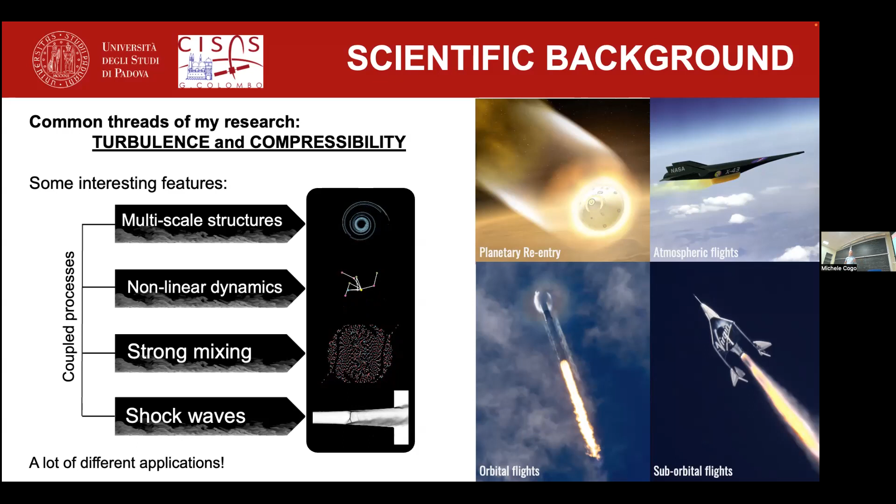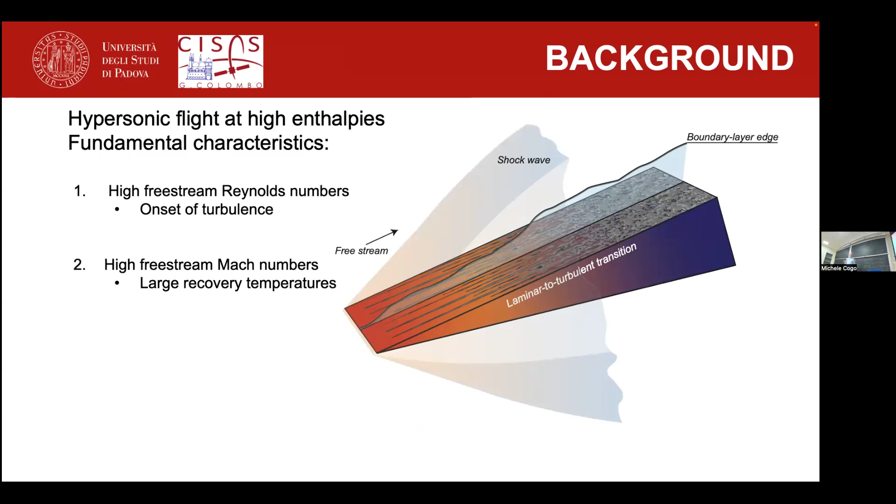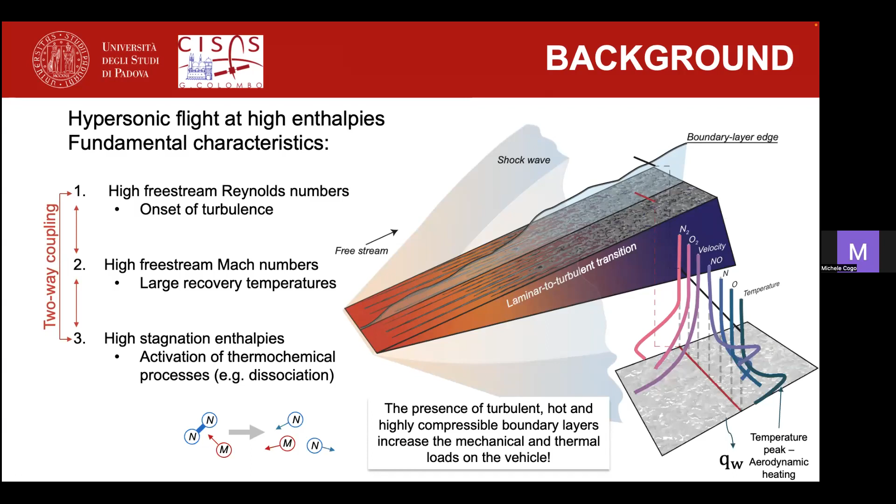There is a phenomenon called aerodynamic heating, which is really interesting in hypersonics, and I'm going to talk about this a bit in the next slide. In general, the presence of turbulent, hot, and highly compressible boundary layers increases the mechanical and thermal loads of the vehicle. So we must study them to inform design choices.

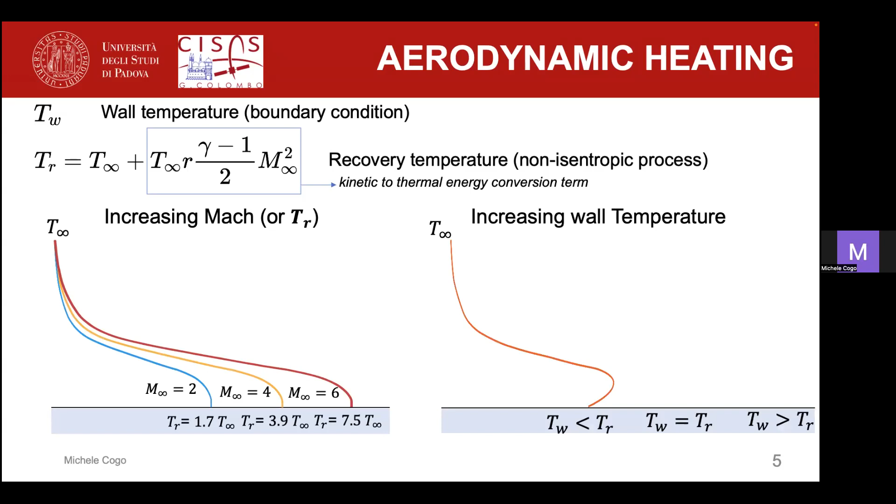And this means that you have a formation of a local peak. And this is the most interesting case, the case where aerodynamic heating is generated, because the friction of the flow with the wall transforms kinetic energy into heat, and this heat is transferred from the flow to the wall, and it's a problem.

Then you can, as a thought experiment, increase more and more the wall temperature, but you will encounter even higher temperatures. This is relevant for some results we will see later, and it's an interesting fact of hypersonic flows that you have a non-monotonic behavior of temperature near the wall.

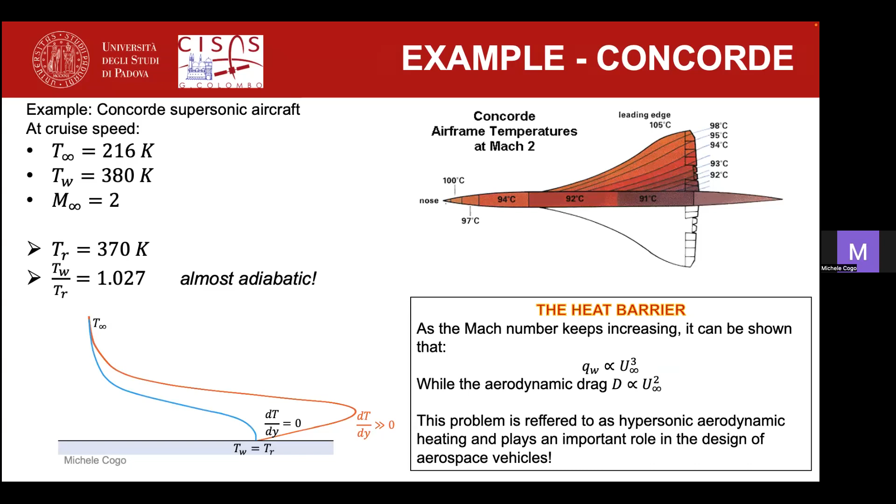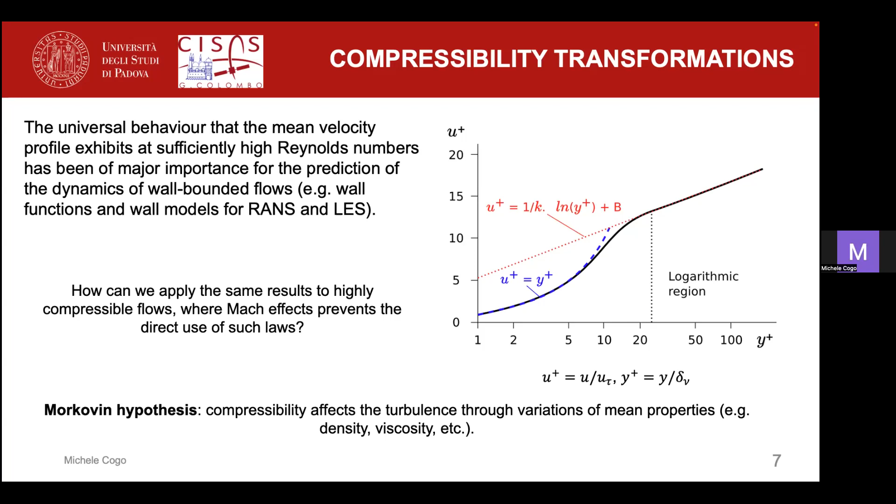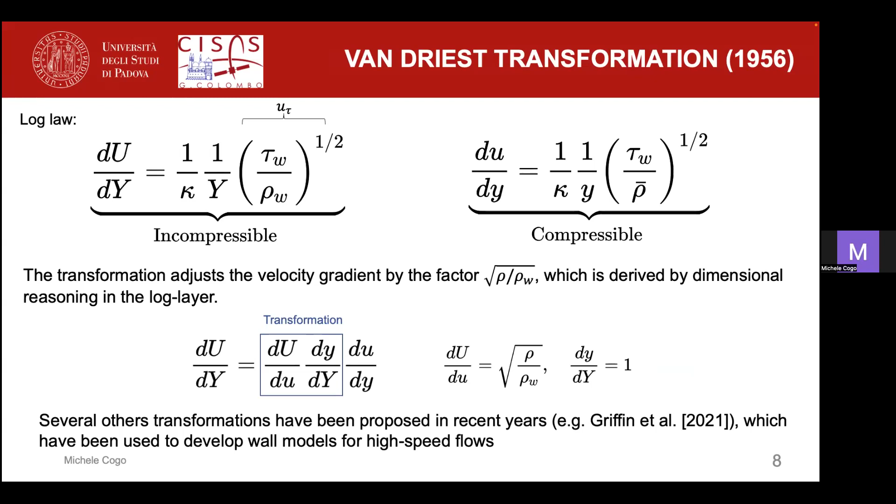So the open question that I'm going to try to answer in this talk is that, from a physical perspective, we would like to address the effects of Mach number and wall temperature in high-speed boundary layers, and maybe see if this compressibility transformation can work to recover the expected behavior of the mean velocity.

Another question that maybe isn't so clear now, but I hope to make clear in future slides, is that the degree of wall cooling or wall heating—the aspect I was talking about before regarding the peak in mean temperature—is something important to define properly, because it can vary both with the wall temperature and with the Mach number.

So I'm going to try to address this question, and then we're going to address some more modeling perspectives. I'm going to talk about the state of the art of wall modeling for high-speed hypersonic wall bounded flow.

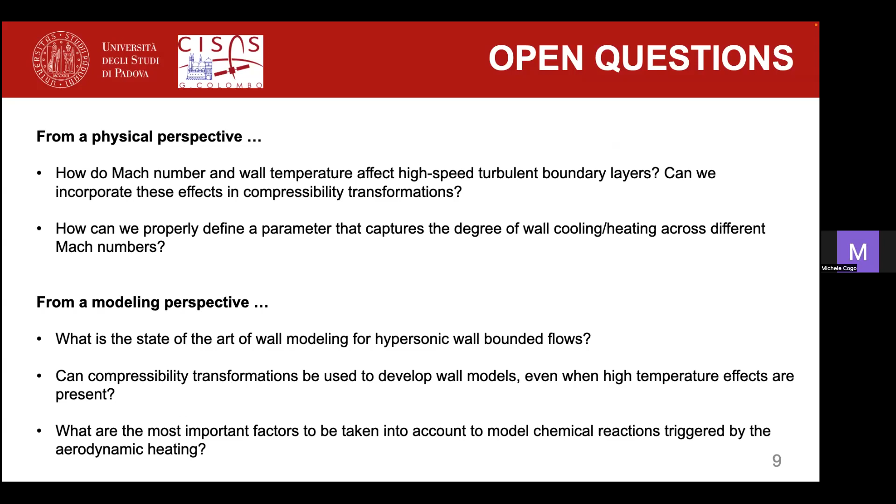I'm going to try to make you see how the compressibility transformation can be used to develop these models. And then we're going to further delve into more complexities of this physics by taking into account chemical reactions triggered by the aerodynamic heating. In general, I want to stress that the first part will be about direct numerical simulation, so we can afford to talk more about physics, because we have confidence that the simulation can resolve all the scales, but they are still calorically perfect gases.

But in the last part of my presentation, I will talk about models with reacting mixtures of thermally perfect gases. We're going to see even some applications where the temperatures are so high that the chemical reactions are activated. So let's start with the first part.

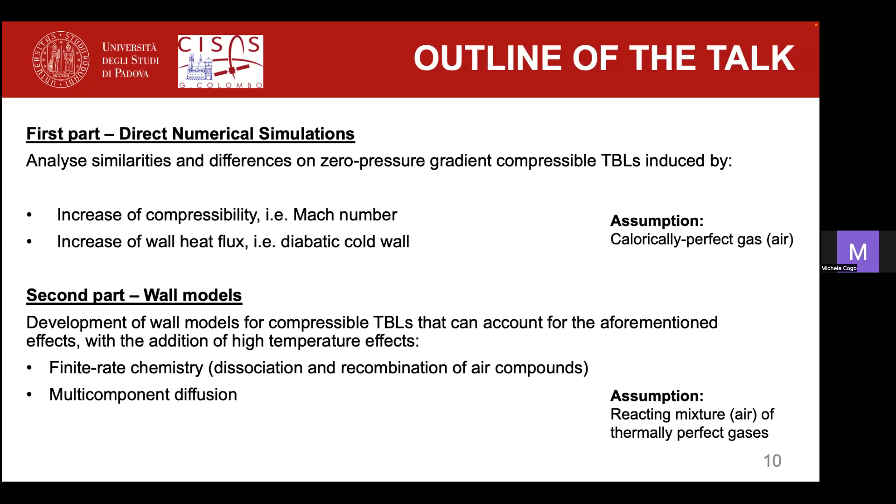The first part is, of course, in collaboration with my supervisor, and then with Professor Bernardini and Chinappi from Sapienza University of Rome and Tor Vergata. With this collaboration, we developed several databases in direct numerical simulation. Here I'm going to present one such database, and we use the solver Streams.

It's an open source solver oriented to modern HPC platforms that can be parallelized both with CPUs and GPUs. We use the cluster Marconi 100, and just to give you a sense of how expensive these simulations are, some of these simulations require up to 28 billion nodes. So you can see why there is even a need for creating wall models.

The database I'm going to present consists of 12 cases at a fixed Reynolds number, but varying the Mach number from 2 to 6. And the diabatic parameter, which is a parameter that takes into account the differences in the wall temperature with respect to the free stream temperature and the recovery temperature, with 4 values for each Mach number. I'm going to try to explain why we decided to fix this parameter and not the more obvious wall-to-recovery temperature ratio that I used before in the Concorde example.

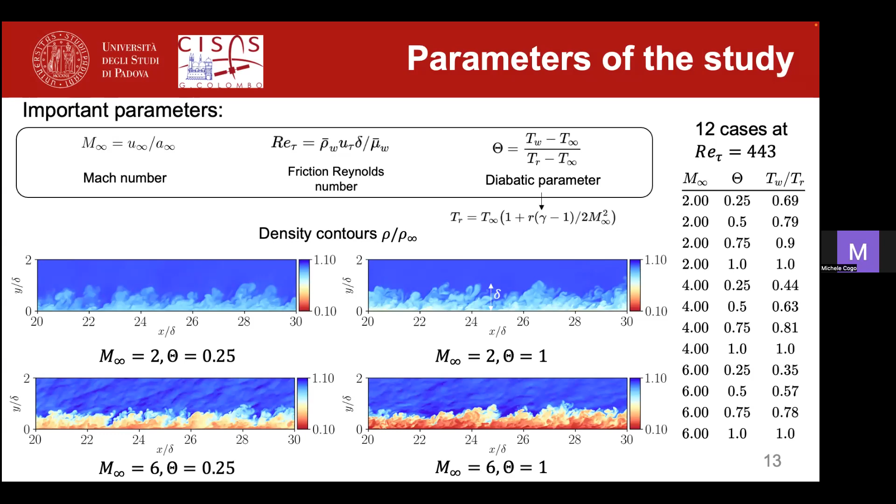But for a moment, let's just see the major differences. You can see from Mach 2 to Mach 6 how drastically the density field changes. There's a huge variation of density, of course, in the hypersonic case. Then we can try to see what I explained before regarding the velocity profile. You can see here in blue an incompressible profile that agrees very well with the log law. But as you go higher and higher in the Mach number, you have a more pronounced mismatch.

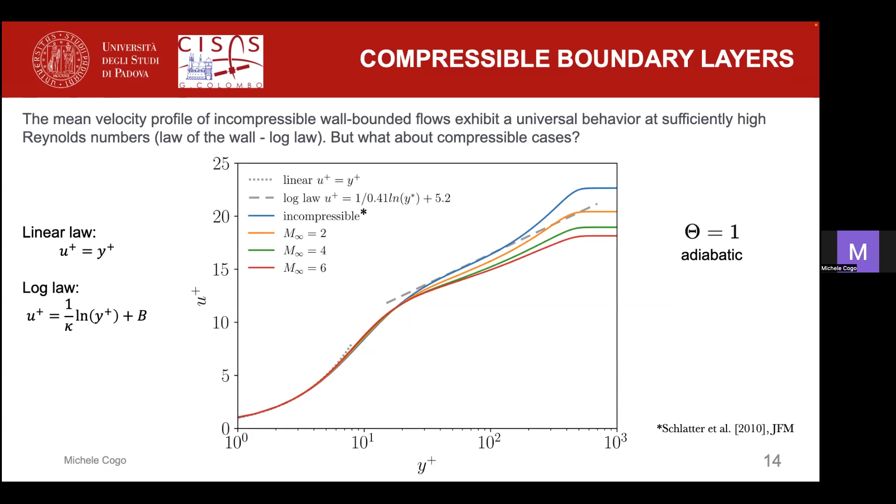These are just for the adiabatic case, so theta is 1. But if you go to the cold wall condition, you have even worse results. So let's try to see the Van Driest transformation in action. You can see that there is some sort of recovery of agreement with the log law, but still the hypersonic case is not fully in agreement.

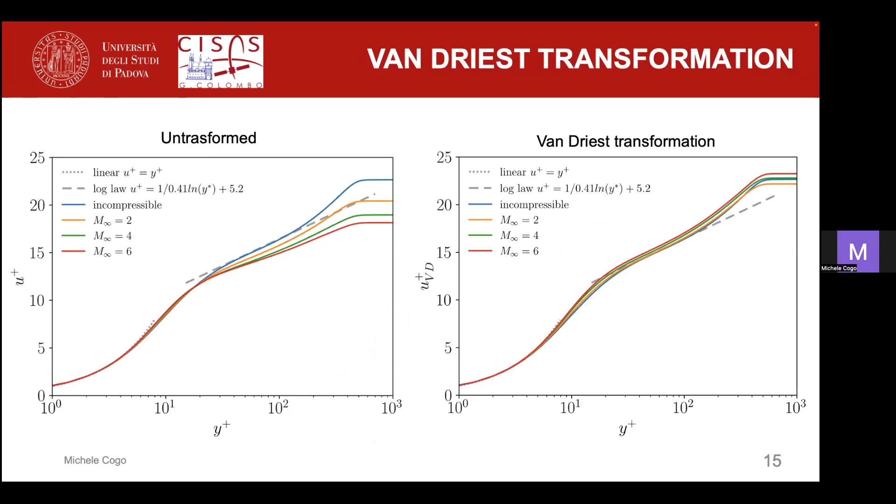For instance, I mentioned before the Griffin et al. transformation, which is a recent transformation that has been proposed. You notice that it's not only the velocity that is rescaled, but even the wall-normal coordinate, so the profiles are shifted. But there is an excellent agreement with the log law for all the profiles. You can see, by looking even at the date it was published, that there is huge interest in this compressibility transformation, because when you can recover an expected behavior that is universal, you can apply wall models.

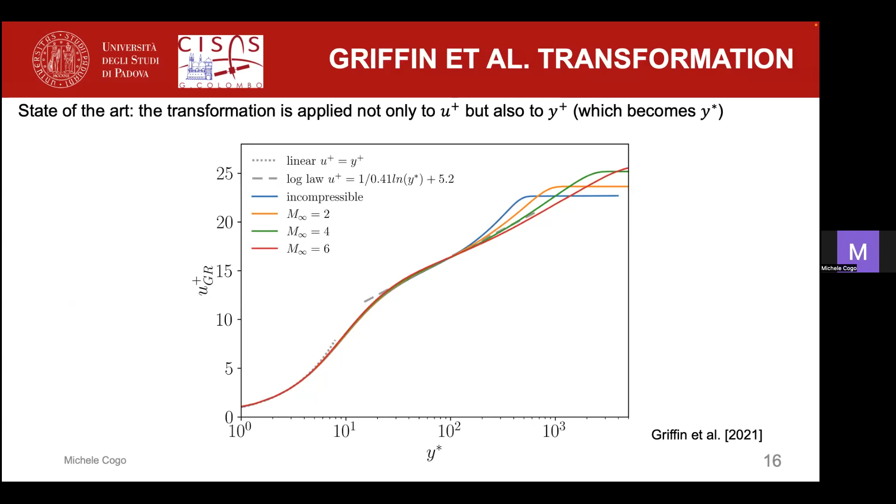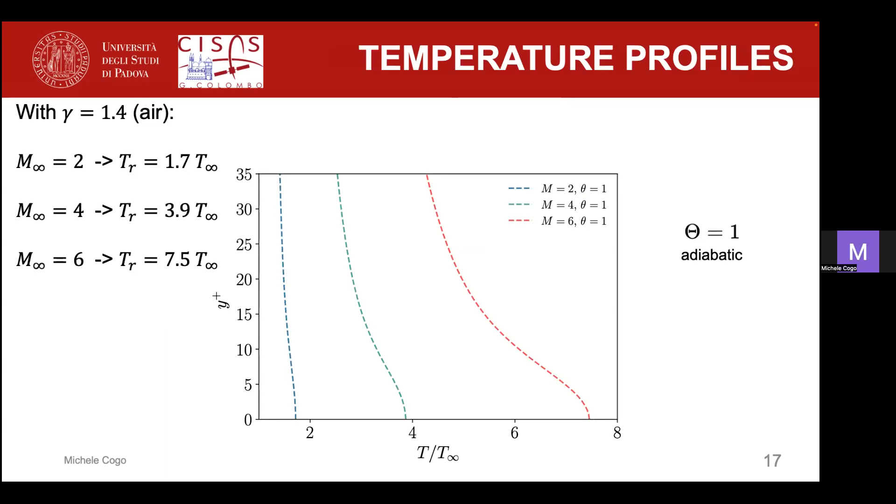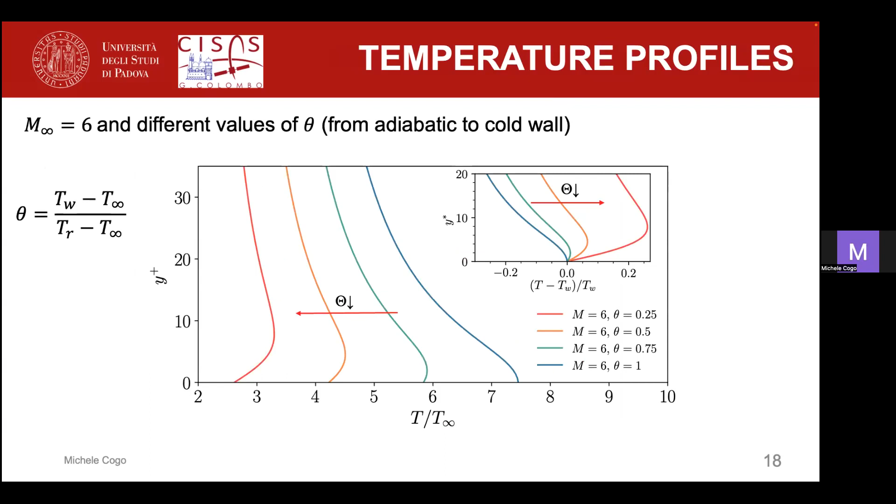Another interesting point is that the peak gets higher in the wall-normal direction as you go with colder temperatures. This is something we were interested in, because, for example, the use of the diabatic parameter is important in this sense. When we fix the wall-to-recovery temperature ratio, we noticed that we were not obtaining expected results. Instead, what really mattered was the difference, this term, the kinetic term that can be converted to thermal energy.

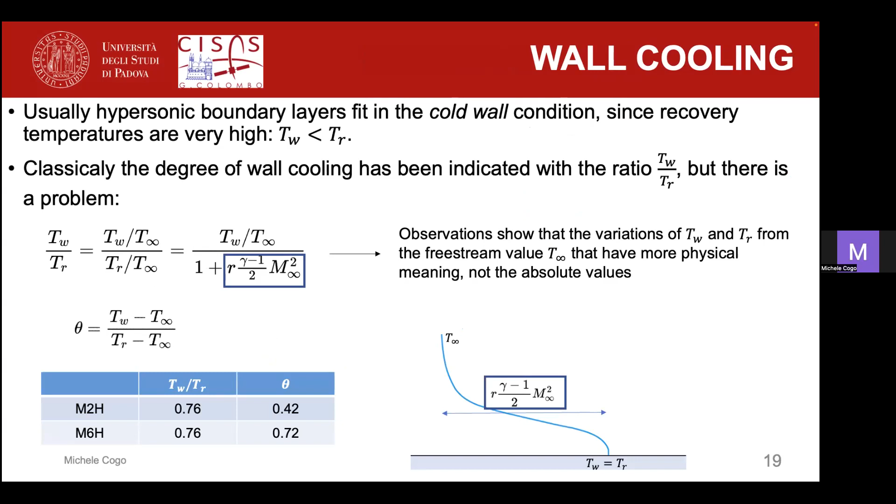You can see from Mach 2 to Mach 6 that if you fix the same wall to recovery temperature ratio, the diabatic parameter is really different. Let me show you what changes.

On the left, I have the coldest case at Mach 2 to Mach 6, and on the right, I have the adiabatic case. The first thing I want to stress is that once again, thanks to fixing this diabatic parameter, we see a similarity of comparison between velocity and temperature in the coldest case and in the adiabatic case, we do see similar features.

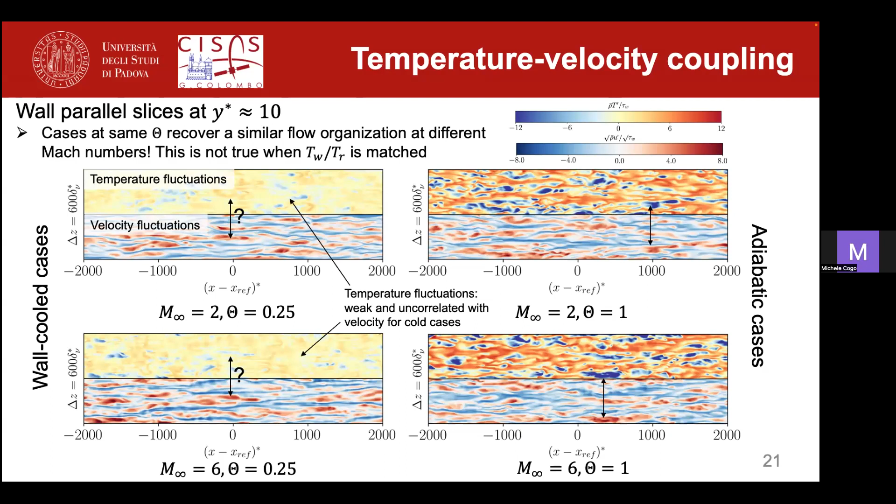In the adiabatic case, you see a very strong similarity between the two fields. You can even spot the same patterns. So we wondered, why is it that when you go to colder temperatures in the boundary layers, the fluctuation of temperature become almost non-existent and very much damped.

We tried to investigate it, and we saw this fact even in the RMS of temperature. You can see that as you go colder and colder with the wall temperature, you see a damping. And around the value I showed you before, where I took the slices, you can see a minimum being apparent. There is the interesting feature that a local maximum is present near the wall.

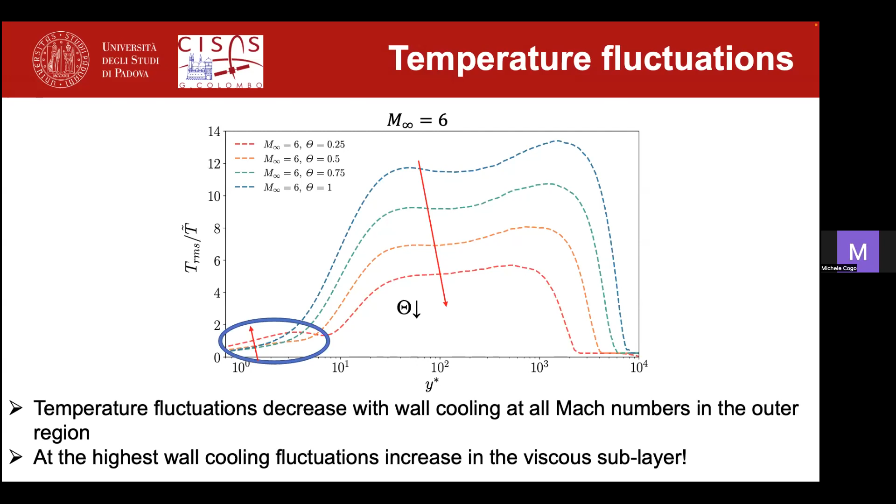We were interested in trying to understand and come up with a physical explanation of this behavior, because you start with a monotonic behavior to the wall, from the wall, with the adiabatic case, moving to a non-monotonic one.

So we tried to come up with an explanation for this, and our explanation takes into account the generation of temperature fluctuations by means of thermal production, which is similar to the production of turbulence. You have a turbulent correlation between velocity and temperature, and then you have the mean temperature gradient.

So our understanding of the phenomena looks like this: in the adiabatic case, if you go around 10, you can see that you have a gradient. Here it's exaggerated, but if you think that a certain temperature T1 gets transported upwards to another location, it will find a very different temperature T2, and you will have the generation of temperature fluctuations.

Instead, if you look at the same spot but for the wall cool case, you can see that when you go from one temperature to the other, transported by a certain velocity fluctuation, you will not find a very different environment. This is our explanation for why you do not find the temperature fluctuation.

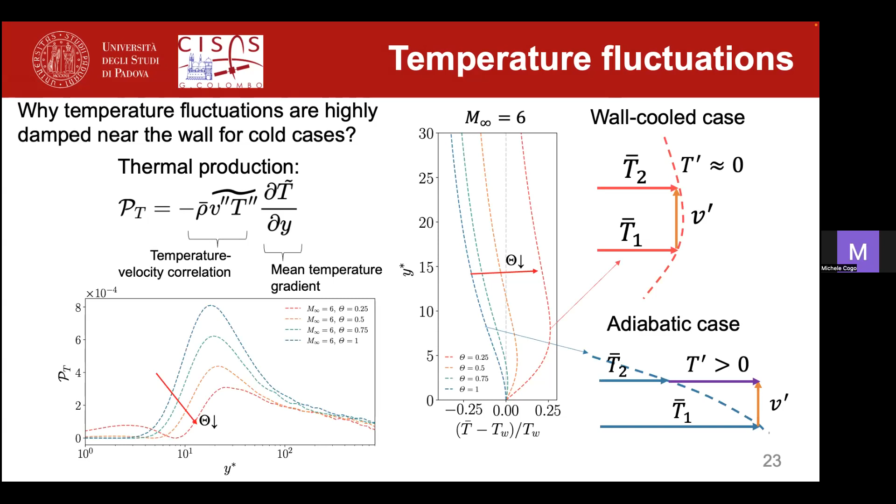This is also visible in the profiles of this term. You can see that the production of thermal energy is very much damped near the wall, and a local maximum is present here.

The reason for that is that if you apply the same reasoning of a gradient being present, you can see that there is a gradient below the peak location for the coldest case, which generates a local peak in temperature fluctuation.

So in general, we discussed these effects related to the Mach number and wall temperature, and we observed these phenomena of the damping of temperature fluctuation due to wall cooling. We also tried to give an explanation of this secondary peak that we just discussed.

We also had a lot of different discussions that are not being covered here, but if you are interested, there are two references, or you can also ask me questions now or later.

So now I'm going to proceed with the second part, if you do not have any urgent questions.

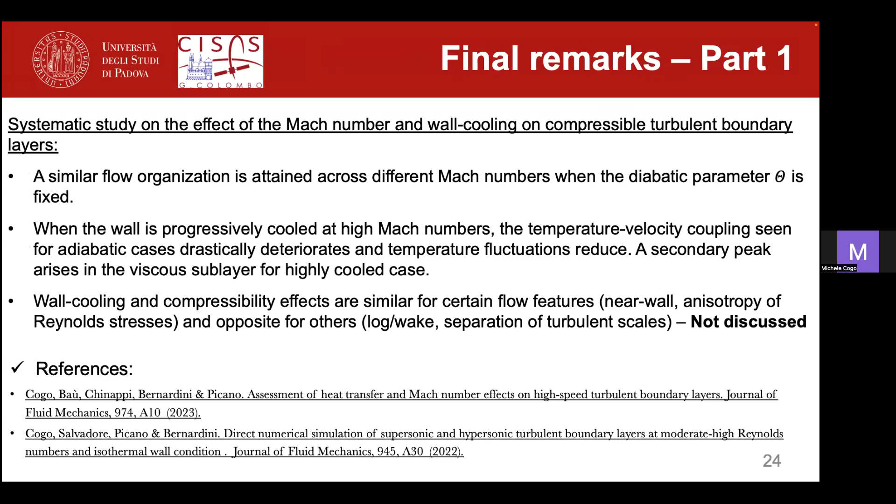So the second part is we will make a shift to wall modeling. This is work that I've done at Stanford when I visited Professor Parviz Moin, and I collaborated with Dr. Kevin Griffin and Christopher Williams.

Since we now shift to wall modeling, we have to justify why we want to do this. In a broad sense, the problem with wall bounded flows is that the energy containing scales near the wall are very small. Both LES and DNS have similar computational costs because you have to resolve each scale at the wall. So there is some hope for wall modeled LES because it promises a linear dependency with the Reynolds number of the number of computational points.

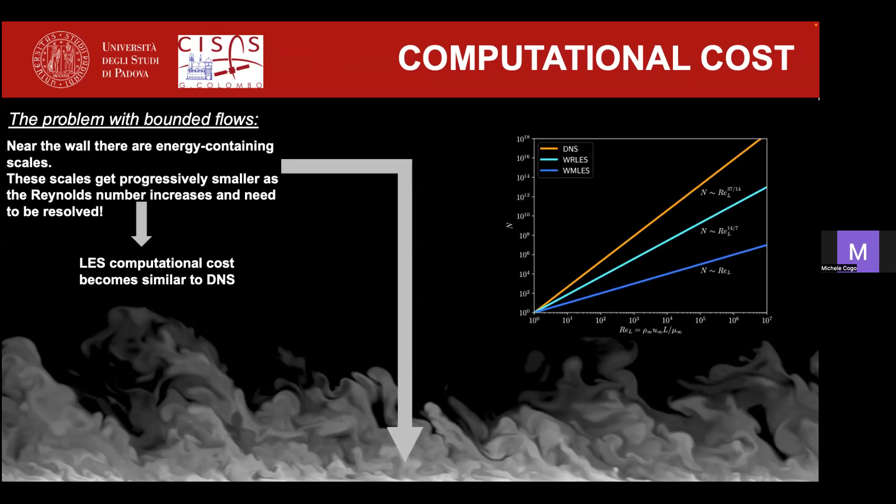The concept is that you want to have your LES simulation on a Cartesian or whatever grid you like, but from one point below, you want to use a model instead of resolving all the scales. There will be a matching location at a certain height that gives input to the model with certain quantities, and as an output, you inform the LES solution with the shear stress, the heat flux, and other quantities you may want.

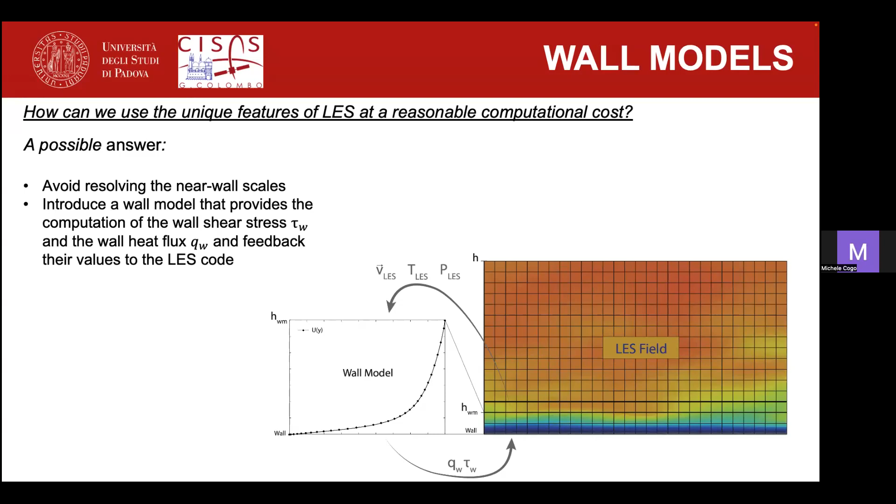The most famous wall model used in wall bounded turbulence is the equilibrium wall model. That is essentially the Reynolds averaged equation of the Navier-Stokes equation, but with some assumptions, and thanks to these assumptions, we reduce this equation to ODEs, not PDEs.

For compressible flows, you do have to carry even the energy equation, otherwise you would have only the momentum equation. You can solve them on a separate grid and compute from this equation the velocity and temperature profile that you can use to compute the shear stress and the heat flux.

I want to stress that these are variable properties in compressible flows, so the viscosity will depend on temperature. The eddy viscosity will depend not only on Y, but also on temperature, density, and so on.

Another idea proposed very recently is that you could use the momentum equation like it's used in incompressible flows with constant properties. So you assume temperature, density, and viscosity are constant, and you obtain from this some sort of incompressible velocity gradient that you can try to transform back to the compressible counterpart.

We said before that compressible transformations map a compressible profile into an incompressible counterpart to have agreement with the log law and so on. Here you use them in the inverse sense.

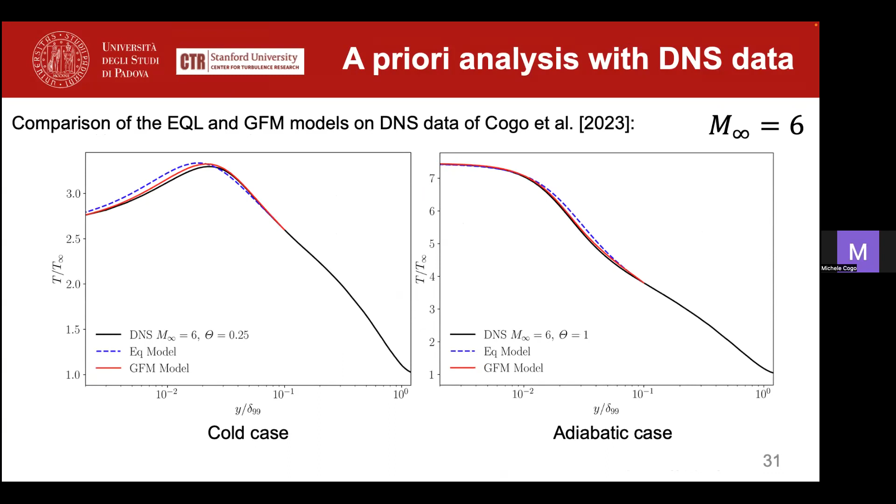My work at Stanford has been devoted to using these models, but applied to cases with very high enthalpies and chemical reactions. I spoke a lot about aerodynamic heating phenomena, but we also want to take into account the dissociation and recombination processes that occur at very high temperatures.

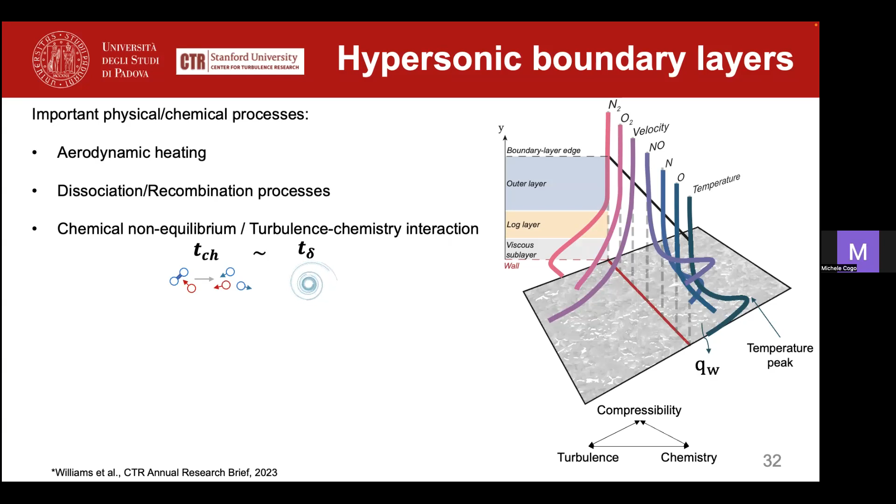Another important aspect to take into account is that the chemistry is not in equilibrium with turbulence—the time scale in which chemistry happens is similar to the time scale of turbulence. For this reason, you cannot consider the chemistry as frozen, for example, or in equilibrium, as many different applications instead do. So we want to develop wall models for this application.

We want to shorten the time to solution and tackle complex configurations. To do this, we use the DNS dataset of Williams and others. The dataset is from just last year, because datasets of this kind were not computed until very recently.

The dataset is very useful to develop models because it has a fairly high Reynolds number, an extremely high Mach number of 20, and extreme wall temperatures. To give you a sense of this environment, the temperature is so high that the molecular oxygen naturally present in the air is almost entirely dissociated near the wall.

So you have a very active environment in the chemistry sense. This is a cartoon representative of what I told you before in the wall modeling. We have a matching location where we sample the field with certain quantities, and we want to output other quantities.

Like the shear stress, the heat flux, but even the mass fraction of air, because they do vary at the wall. So we try to extend the GFM model, that is what I told you before with the inverse velocity transformation, to solve for the species partial density equation.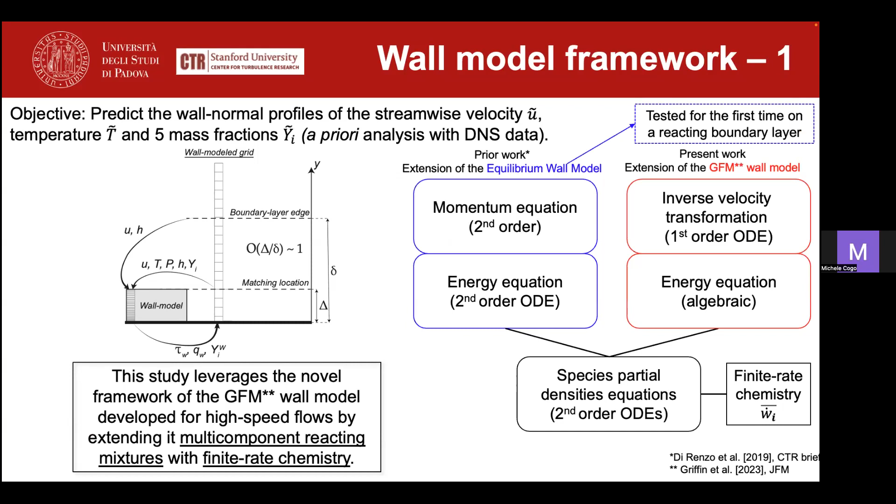But both models have been tested for the first time in an a priori sense in a reactive boundary layer, since it was not available at the time.

I just want to mention briefly the species partial density equation, since it's something that I know is a bit complex, but essentially there is a term accounting for the laminar diffusion and another one for the turbulent diffusion. And the most important term we want to care about here is the chemical reaction rate.

This is the term that makes chemical compounds appear or disappear as a function of the temperature. So you have a certain temperature that maybe activates some chemical processes in the distribution of the mass fraction and the density at that point.

So we had an assessment of turbulence and chemistry interaction. And we suspected that this term, the chemical reaction rate that I just explained, was the leading cause of errors. So we imposed the DNS profile of this term into the wall model equation as a known quantity.

So in general, the final remarks of part 2 are that we propose an extension of a present model that has had a lot of success for high-speed flows, but was not formulated to include multi-component reactive mixtures with finite rate chemistry and differential diffusion.

And we saw some improvements compared to the previous work that extended the equilibrium wall model, having better results in the velocity and temperature profiles and in the prediction of the shear stress and the heat flux. But both models have some difficulties in predicting the mass fractions, with minor differences between each other.

Since we saw that there were minor differences between each other, we thought that there was a big assumption for both of them that was the leading cause of errors. And this assumption was the modeling of the chemical reaction rate, which was modeled only with the mean quantities.

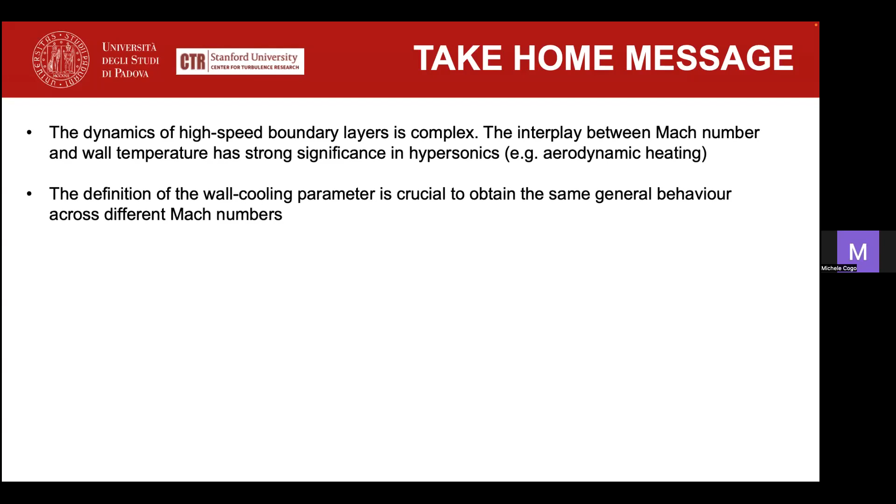One very important aspect of these effects is the generation of the aerodynamic heating. That is something we want to know very well to inform design choices. I tried to make the case why we do need to care about a specific wall cooling parameter that can obtain the same general behavior across different Mach numbers. For example, the parameter we used had the feature that you could see the same peak location in the wall normal direction across different Mach numbers.

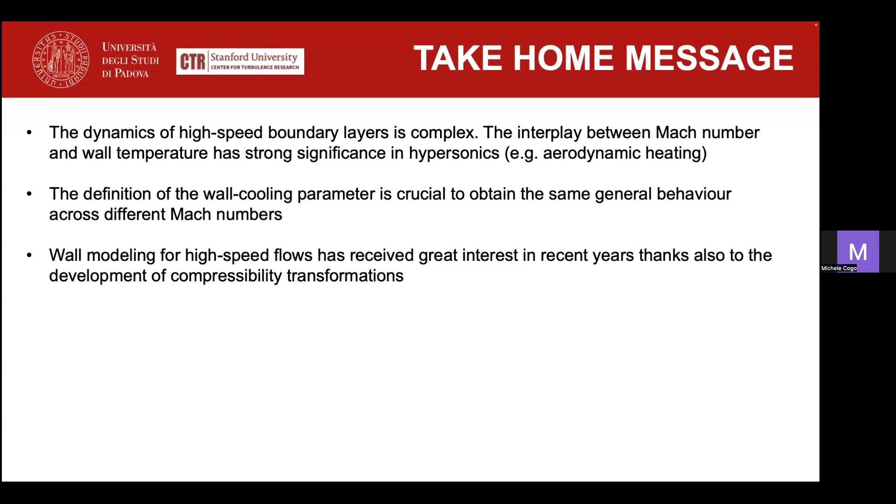Then in the second part, I talked about wall modeling for high-speed flows, which has received a lot of interest in recent years, thanks also to the development of compressibility transformation. Thanks to this transformation, we tried to extend the GFM model, accounting for high enthalpy effects, with good results compared to previous works.

And then we confirmed that one main bottleneck when working with chemically reacting boundary layers is the modeling of the chemical reaction term. We want to understand how to solve this problem, and we know it is very present, for example, in the field of combustion. I've been a little fast, but thank you for the attention. If you have any questions, I'm glad to answer.

Thanks for the presentation - really, honestly, pretty impressive. I really like it. So if there's any question from the audience or online, you can go ahead.

I have one question, one curiosity, and... no, the first one, you can ask three if you want. That'll be fine. The first one is: have you ever thought to correct the chemical reaction rate by a data-driven technique?

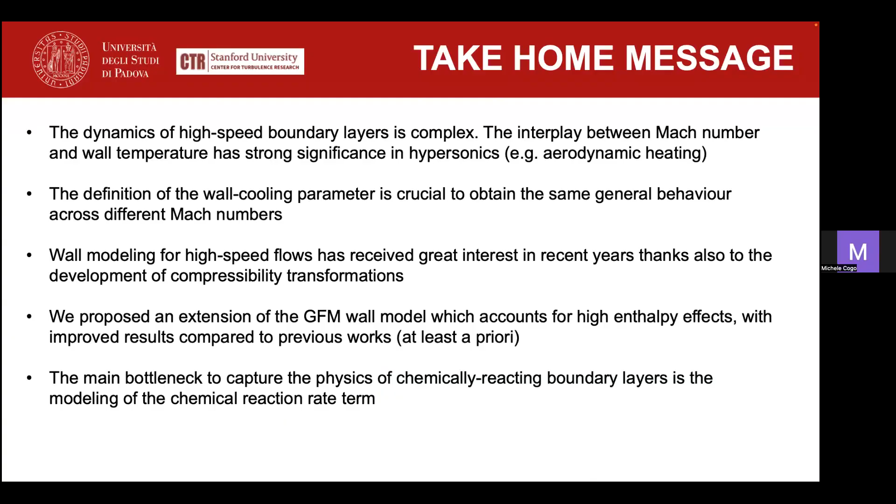Yeah, this is something we thought about. I know that in combustion this is something that's really used. In general, the really tricky part about this term is that... sorry, let me go back.

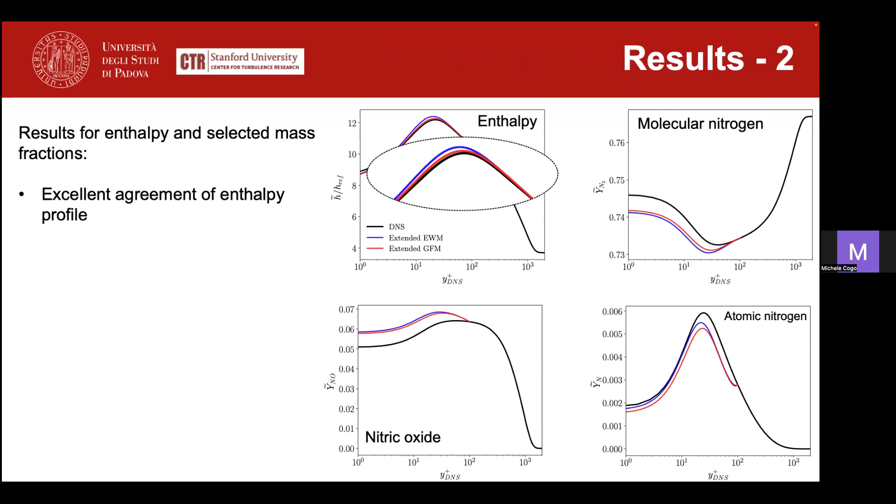The really tricky part is that usually with a data-driven technique, you can think that, for example, the temperature variance is what varies the most. So if you take that into account with a data-driven technique, you have several cases. You can learn the model to understand that if you have a certain degree of temperature fluctuation, it will respond in a certain way. This works, but the really tricky part for us is that all the fluctuations matter, and all the correlations - all the terms in the matrix will be important. So you would need a ton of different DNS datasets, and at the moment we have like three DNSs to work with. It took quite some time to have all those profiles converged - a lot of DNS and a lot of headaches too. So the point for us is that we do not have reliable datasets to use, so we have to be informed by physics more than data.

The second one is just out of curiosity: what type of space discretization have you used in your simulation?

In the DNS simulation, we use the resolution typical of DNS, so you go down below the Kolmogorov scale. We resolve the flow with, for example, at the wall a y-plus of 0.5, and we have a certain stretching function in the boundary layer that allows us to resolve the whole boundary layer with the necessary points. It's finite difference - yes, we have high order finite difference.

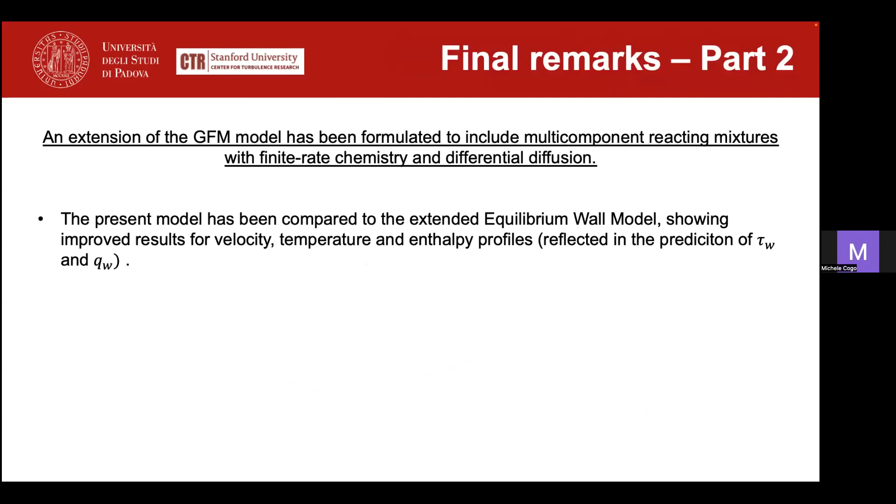But before I get there, the first thing I wanted to understand is the extension of the GFM model - yes, I probably missed it, you might have shown it. So what is the extension of the GFM model? The extension is that it has been formulated for calorically perfect gases. I did not go into the details - oh sorry, I'm going in the other direction.

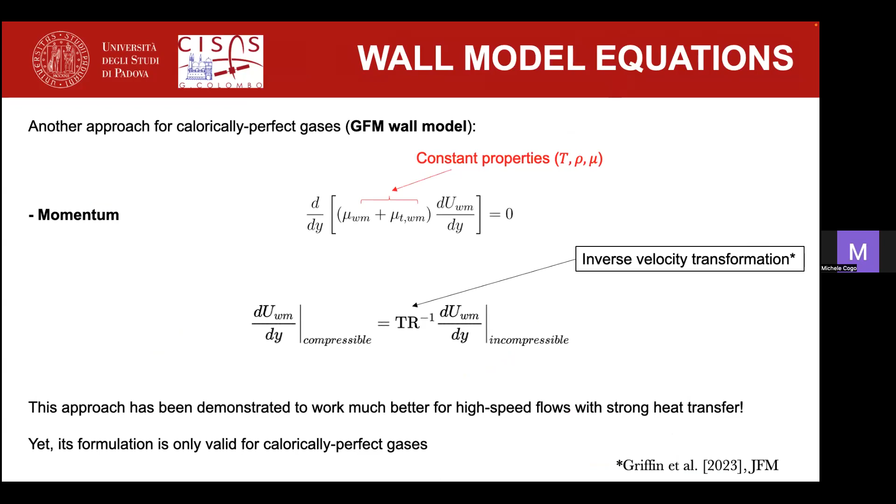I did not go into the details of how the model is formulated because it's still a lot of different things. But in general, I wanted to pass the message that the Griffin model has this inverse compressibility transformation for the momentum, but for the energy, it has a temperature-velocity relation that we changed into an enthalpy-velocity relation, because we do not have a linear dependency between temperature and enthalpy. So we changed one equation of the model, and then we added the species equation. We coupled the model, the present formulation, with the species partial density equation, and we had to come up with a lot of different modelings for all these terms. So the extension was in this sense.

So you have not shown it explicitly, but I see the idea. But then, is this your species transport equation? Yes. Or is it just at the near-wall region? These are a priori analyses. We are solving this equation for the near-wall region, and we are trying to match DNS data from a matching location that is given. So, for example, here you see the model matches perfectly with the DNS because we impose the temperature at this point, and then we solve this equation throughout the whole domain.

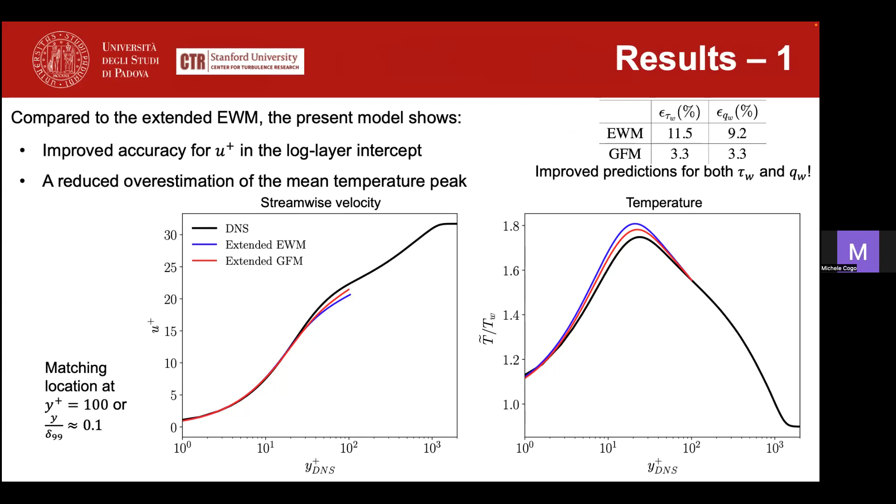The reason I'm asking is because some of the species equations I've seen look like the full momentum equation, except with this u variable being the transport, you have a species term instead. So are you using that equation or some form of it? Maybe you are referring to more of a passive scalar transport, something like that. That also can be, but our point is that we are still transporting a variable, but here there is a source term — we have finite rate chemistry. So the variable is not only transported by the fluid like a passive scalar, but it's actively changing the fluid through chemical reactions that change the composition of the fluid at that spot. So this term really makes it different from a passive scalar equation.

Okay, so this is the ultimate equation that you are solving — there is no other equation? Well, there are a lot of different assumptions and models underneath all these terms, but this is the equation. How do you get this term, μt? This is the eddy viscosity — it's a model for the Reynolds stresses, and we have the Boussinesq formulation.

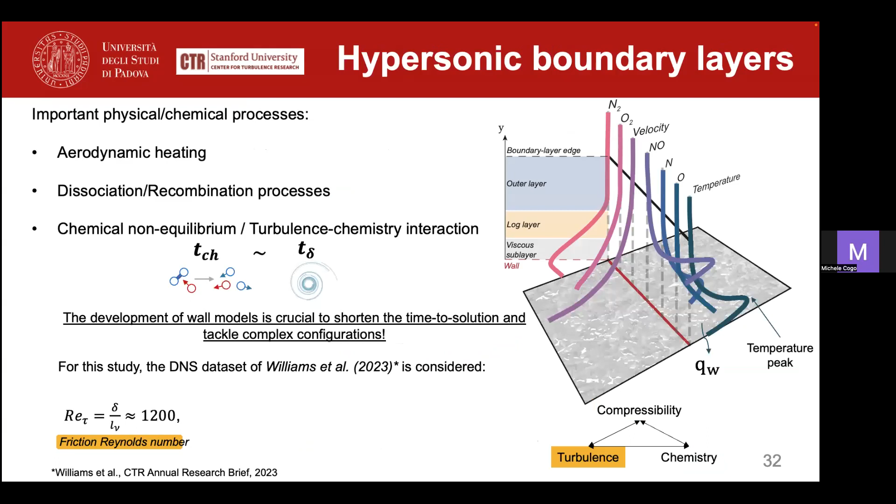So that is — I don't know if you have the power point — yes, with the exponential decay at the moment. I see, so basically μt is van Driest-type damping. Actually, it's not really. This is the way we do it when we use the equilibrium model, but we found smarter ways to avoid using the conventional formulation of μt for the GFM model, because thanks to the compressibility transformation I just showed you, we can obtain μt from the velocity gradient that we got from that same transformation. So we can bypass the conventional mixing length hypothesis model for the viscosity.

I know I can go more into detail on this, but maybe we're going too fast. Yeah, I can see it would take some time, but I'm following as well, I think I got the idea. We can discuss this offline. Yes, sure — this particular question, because I feel it's going to take longer. I just asked one smaller question on understanding the physics, and then someone else can continue.

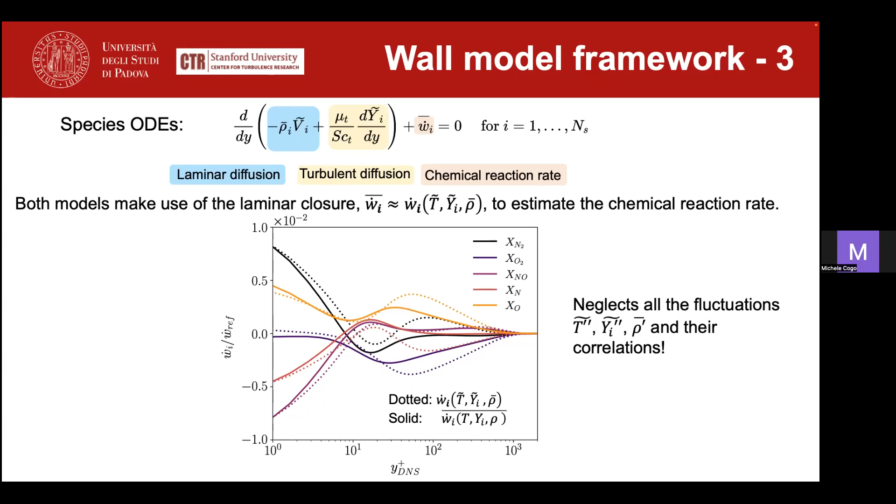So can you go to slide 20? Slide 20, okay, this is okay, is this the one? 20, right? Yeah, 20, 20, okay yes.

So I have two questions here. One, you have this profile which goes like this, and the max is not at the wall, and I wanted to understand this from a physical perspective — why is the max temperature not at the wall? Well... don't look at me like he's gonna answer for sure. Go ahead, no, this is the main point I tried to convey.

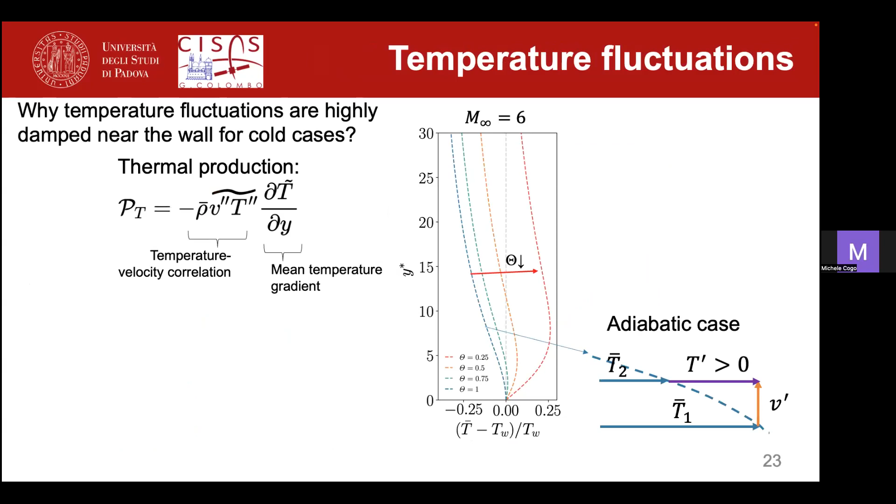So the fact that you have colder temperatures than the recovery temperature forces the profile to make this turn. And you see now they are rescaled — let me show you before. I think I'm going backward, sorry, I think I'm mistaken. So you have this, okay let me go back here. So the fact that you have cooling of the wall, and the wall temperature is lower than the recovery temperature, forces the temperature profiles to make a turn and give rise to a maximum.

And then the real nature of this maximum is connected to the fact that we do have aerodynamic heating, so there is heat generation. I guess on one side you're decreasing the velocity, so you're turning kinetic energy to thermal energy, and so you have a peak. But this is counterbalanced by the fact that you're cooling at the wall. So you have these two things: if you are not cooling, temperature will increase because you're decreasing velocity and increasing temperature. If you're decreasing the temperature at the wall, it's trying to push back this behavior.

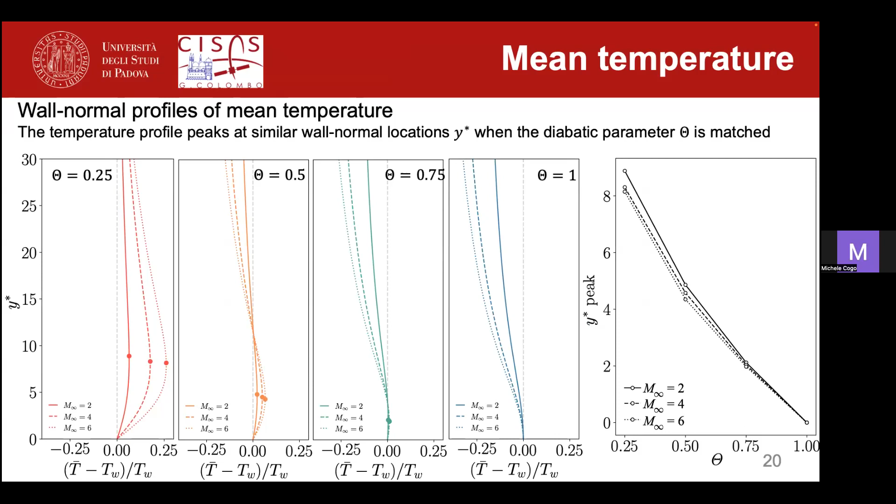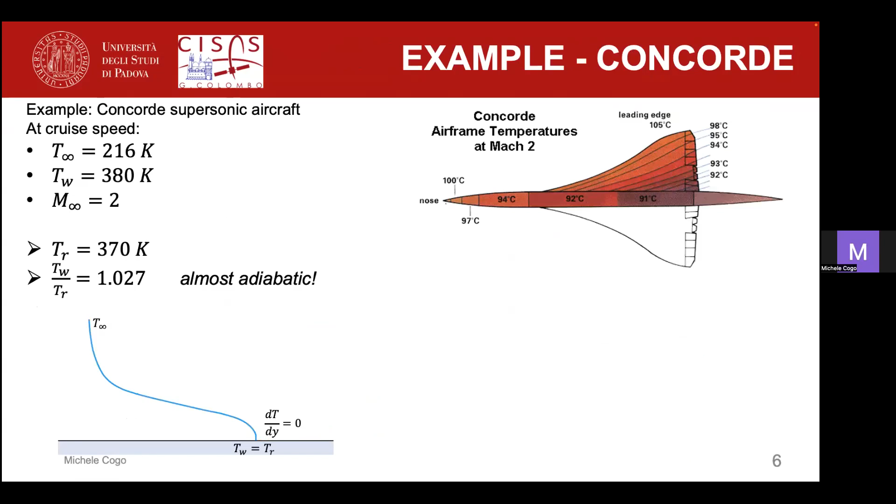Yeah, okay, I can see, stagnation temperature. Yeah, but I see, like I see now. Thank you for your questions. Sorry, no, it was interesting.

How do you deal with the hybrid parallel architecture you showed, with MPI and CUDA? So this code is parallelized with MPI and CUDA Fortran. We have a Fortran code with some flags that can turn it on. You can choose to use the code only with CPUs, but if you have the architecture for GPUs, you can activate these flags and it will automatically parallelize on GPU. Does the whole code run on the GPU, or just part of it? No, the whole code.